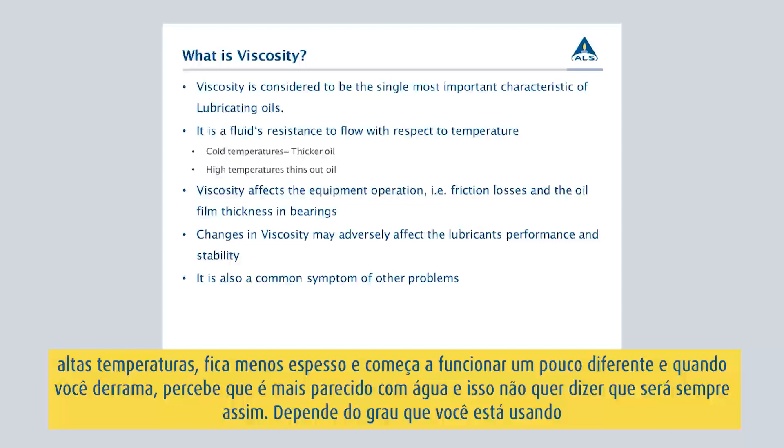Now, this isn't always going to be exactly how it is - it depends on what kind of grade you're looking at. But viscosity, that oil is used to help with friction loss and oil film thickness.

When we talk about oil film thickness, we typically have 3 to 4 general areas: boundary thickness, mixed thickness, and hydrodynamic. As we work our way down that list, film thickness increases.

When you're looking at boundary thickness, that's when you see 2 metal plates rubbing against each other, and you have a lot of friction going on there. It's oftentimes associated with metal to metal, so that's where you would see it mostly when equipment's starting, or when you're having stops, or even when you have a lot of shock with what you're using.

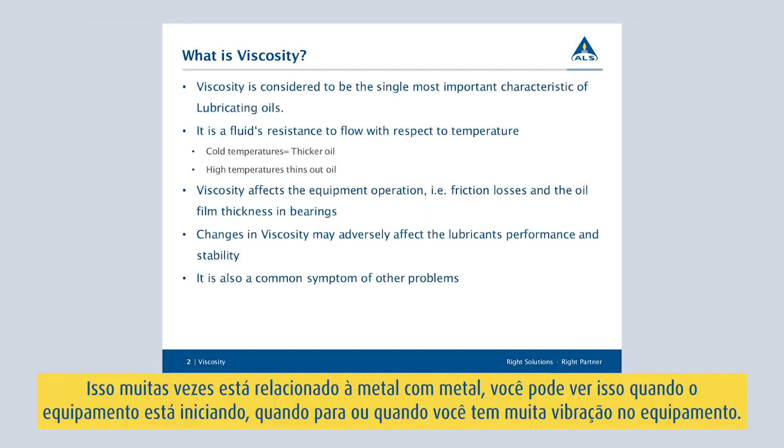When we get into mixed, that means your equipment's kind of been running, or you start to see that thickness increase. And when I say thickness increase, there's a separation being created between your 2 components, and you see more sliding going on and less friction.

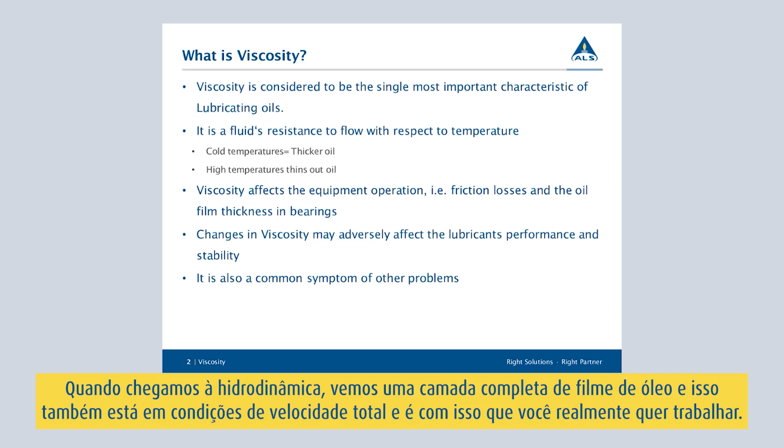When you get to hydrodynamic, you're seeing a full film layer of oil support, and that's also at full speed conditions - that's what you're really working towards.

But the reason I go into this oil thickness is that's how you decide if your oil's working correctly, as well as if you selected the correct oil. All that's important when we start to look at viscosity as a whole, and we start to look at analysis.

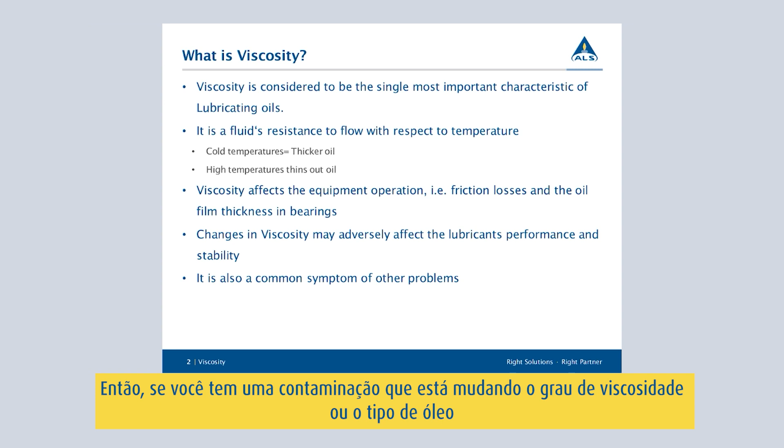As changes in viscosity occur, it starts to affect your lubricant performance and stability. So if you have a contamination that is changing your viscosity grade, or your oil type, making it either thinner or thicker, you start to see that in how it works with reducing friction and creating that film barrier.

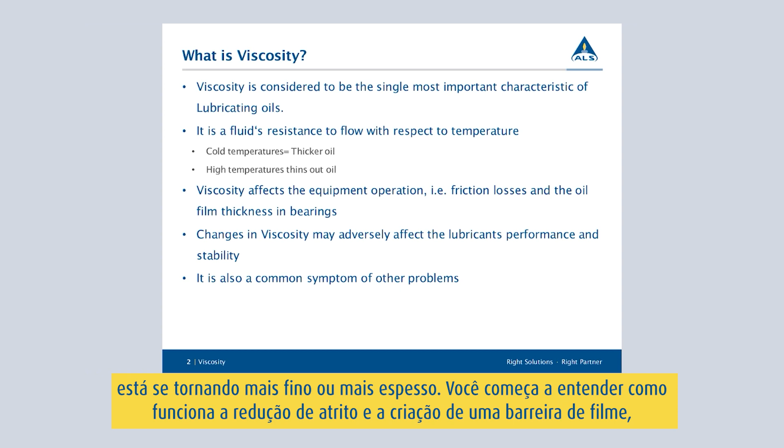So it is also a common symptom of other problems, and we'll get a little further into that later on, but that's just a basic overview of what we're getting at.

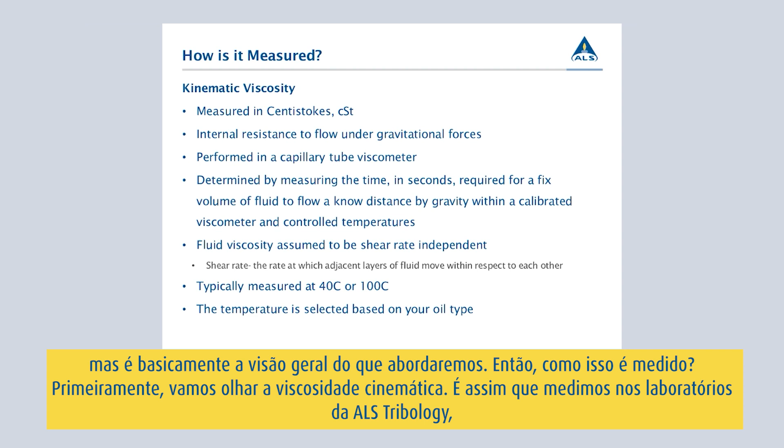So how is it measured? The first way we're going to look into is kinematic viscosity - that's how we measure it here at ALS in the tribology laboratories, and it's measured in centistokes. It's one of the more common ways to measure it. Kinematic viscosity is the internal resistance to flow under gravitational forces.

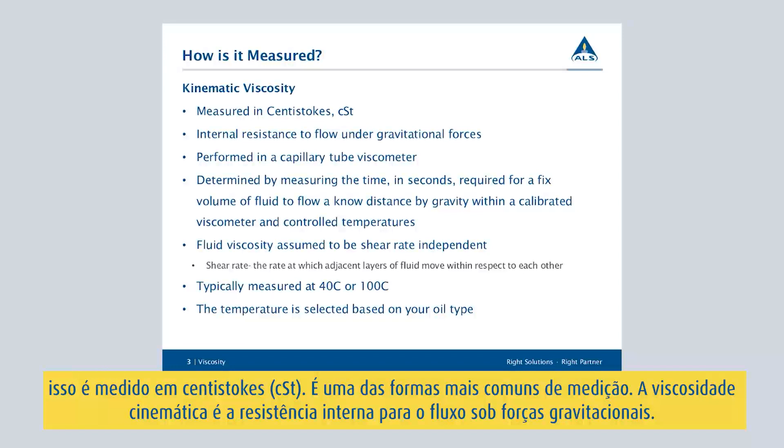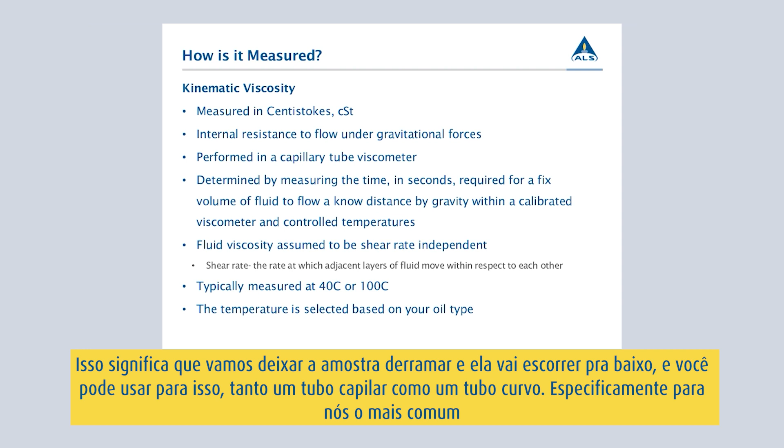Meaning that we'll drop a sample and it's going to flow down. You can either have a capillary tube or a curved tube, but for us specifically, and a more common one, is a capillary tube - meaning it's a very thin tube that the fluid is trying to get through. It's determined by measuring the time in seconds required for a fixed volume of fluid to flow a known distance. So we'll start at the top and work our way to the bottom, and that's a known distance that we're timing.

And so that's how we kind of look at measuring the flow. The temperature is controlled. If you control that temperature, then you can control your centistokes and your data and know that it's comparable. That's what we really get into - you want to be able to trend your history in oil, and having those controlled variables helps with that.

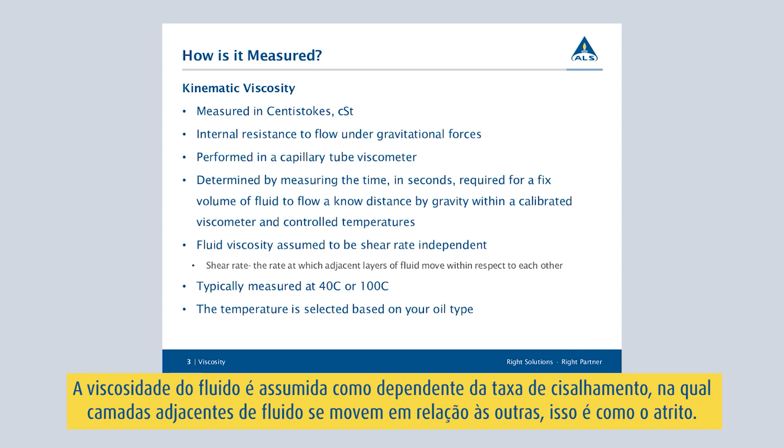Fluid viscosity is assumed to be shear rate independent, and shear rate is the rate at which adjacent layers of fluid move with respect to each other - so that's kind of like friction. With kinematic viscosity, the two common temperatures we see are 40 degrees C and 100 degrees C. When determining which one we're measuring at, it's based on the oil type and the equipment you're running.

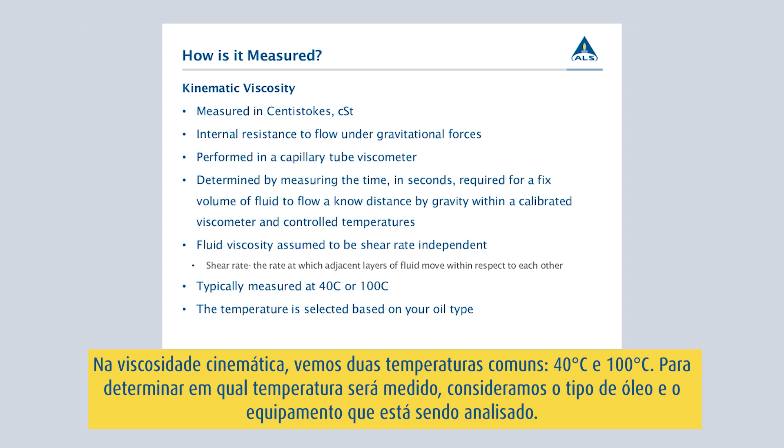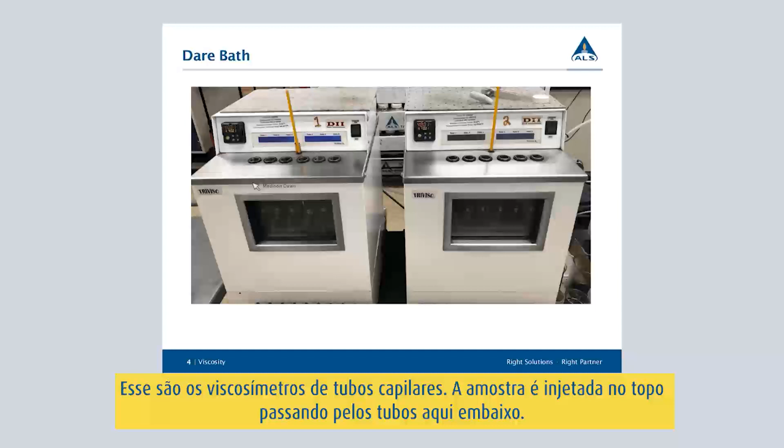These are Dare viscometers, and they use capillary tubes, so the sample is injected at the top into these tubes down here. We have a few different thermometers that we use to measure it, but this is an overview of what the bath is. It's a contained system so that your temperature is really controlled. And then we get into our capillary tubes of what you see.

So this is that top we saw where the oil kind of goes down. You can see in this picture that the top portion is a lot wider - it's what houses the oil. And then when you first inject it, you get into a much thinner capillary portion.

I've included this sensor over here that we use. This first sensor sits right here and basically holds pressure so that we can control the rate at which we drop it. We'll drop that oil sample into the tube, heat it to 40 degrees C or 100 degrees C depending on which temperature we're running at, and once that temperature has been reached, the pressure then releases so the fluid can start flowing.

As you start to flow, you have these three sensors down here, which are all equidistant. It times the distance between each sensor, and you can then get your viscosity in centistokes. This is that last portion, the very thin portion you kind of see, and then it injects out the bottom. So that's how we look at our capillary tube and measure that one.

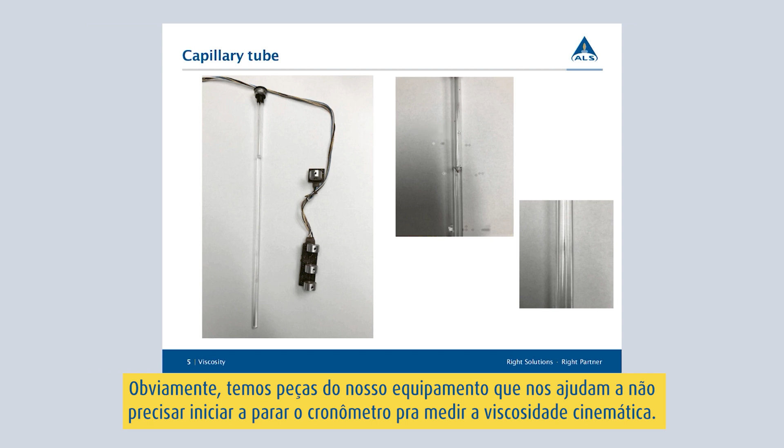And so that's why it's gravitational forces. We obviously have pieces of equipment that assist us in running it, so we don't just have to put it in and start a stopwatch and stop a stopwatch.

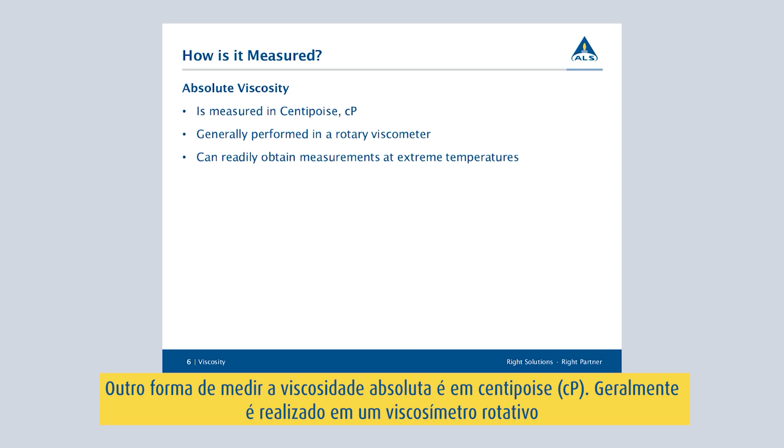The other way it can be measured is absolute viscosity, which is measured in centipoise. That's generally performed in a rotary viscometer and can be used for extreme temperatures - rotary meaning that it spins. What you typically see with a rotary viscometer is that a spinning portion is dropped into a beaker full of oil, and then it starts to spin and measure its resistance to flow in terms of how well it's allowed to spin.

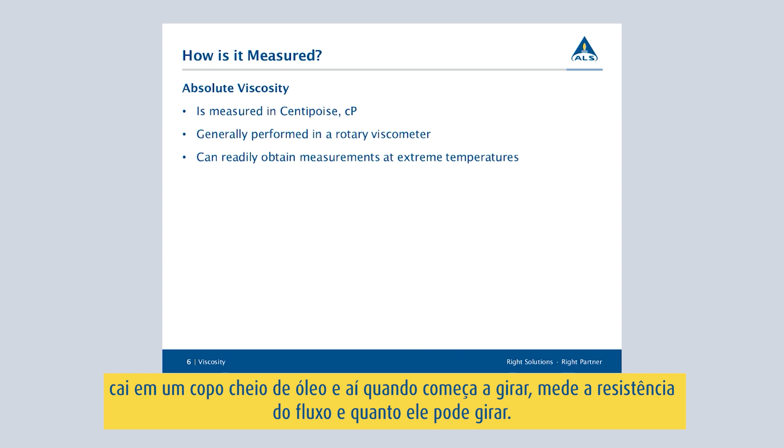It's an interesting setup, but our preferred method is definitely in centistokes - it's a more common one. As you look at your 40 degrees C and 100 degrees C, it starts to give a characteristic of our oil that can often be measured, but doesn't have to be, and is typically given on your product data sheets - that's your viscosity index. Viscosity index is the relationship between viscosity and temperature.

It has to be measured at two temperature points, typically 40 and 100, and you have a viscosity index range from 50 to 200 for common oils. You'll start to see that multigrade oils tend to have higher viscosity indexes, typically above 100. When we talk about terms like multigrade and straight grade, which we'll get into more, that's when you start to see SAEs, which is when you add that W.

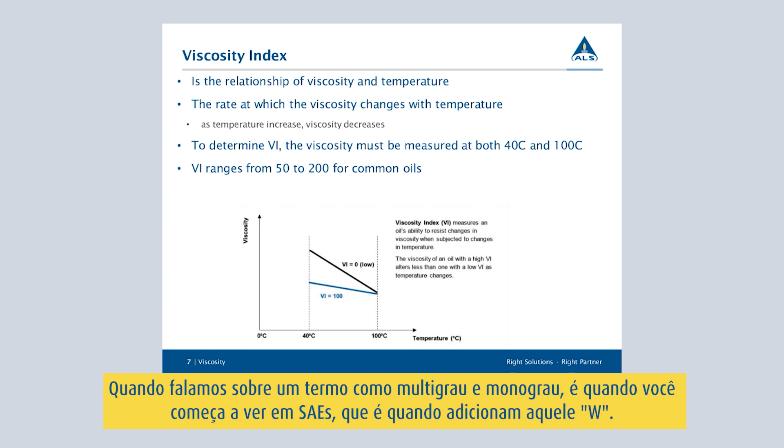Now that we've started talking about multigrade and straight grade, let's talk about the viscosity oil grade system. The first one we'll get into is ISO, which is typical for industrial oils. This one's really cool because the midpoint of each viscosity is a 50% increase above the previous grade. I have an example coming up, but below is ISO 15.

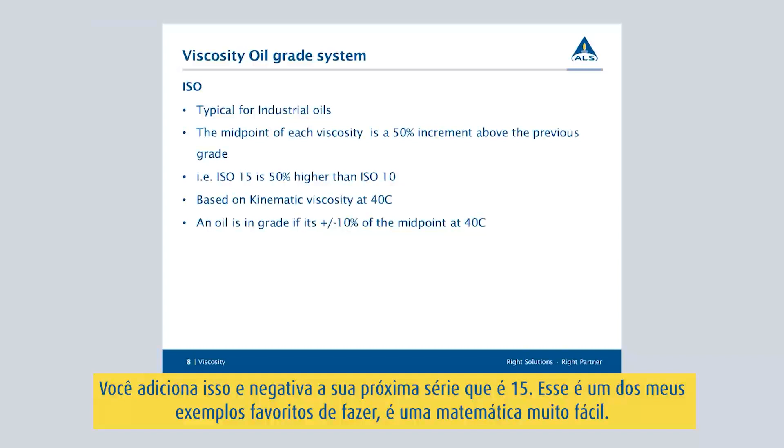ISO 15 is 50% higher than ISO 10. So if you take 50% of ISO 10, that's 5, add that in, and you have your next grade, which is ISO 15. That's one of my favorite examples to do.

It's very easy math. For your industrial oils and ISOs, it's based on kinematic viscosity at 40 degrees C, that's typically what we choose to measure it at. When you're looking at your oil grade range, it should fit into plus or minus 10% of the midpoint. So looking at 10, we say 1, meaning your range should be somewhere between 9 and 11.

Engineers should understand roughly what you're dealing with in terms of pump size, gears, and other components required for these different viscosities. For slow moving gears, you want a thicker oil, and oils that are too thin don't provide adequate protection. For gears that are very small and very fast, you want a thinner oil. This is like your hydraulic pumps or oil-filled bearings.

Typically your ISO 32s, 46s, and 68s are used in bearings and hydraulic applications. Your ISO 150s and 220s are often used in indoor gearboxes. We talk about indoor and outdoor because indoor temperatures can be controlled more, whereas outdoor temperatures you can't control.

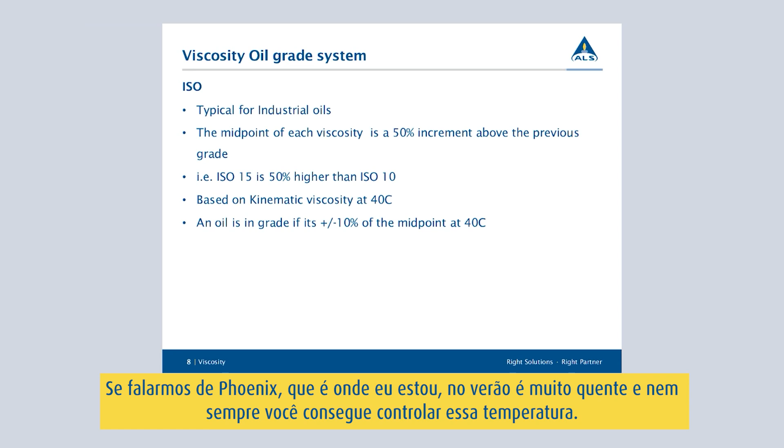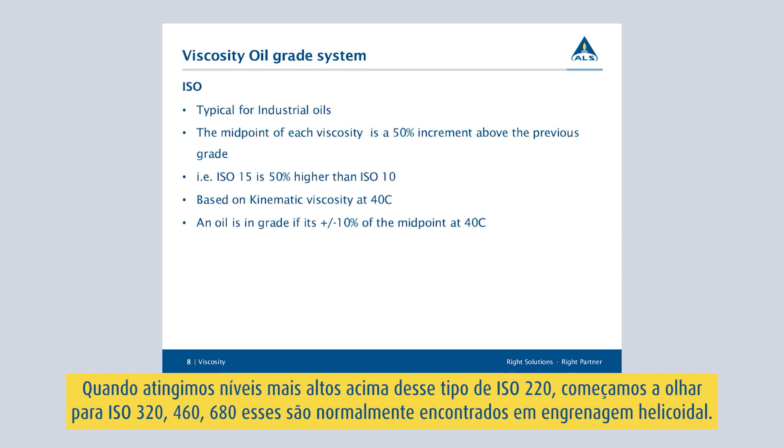If we talk about where I'm based, in Phoenix, summers get very, very hot, and you don't always get to control what that temperature is going to be. When we get into higher grades above that 220 range, we look at ISO 320, 460, and 680s, and those are typically found in worm gear applications.

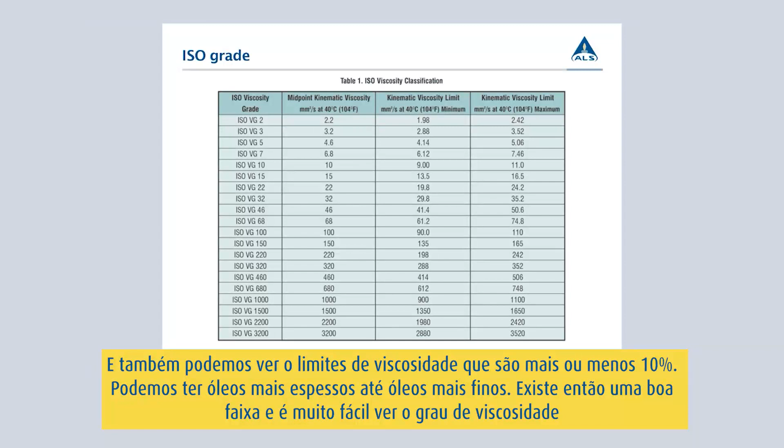So we look at our different ISO grades. We have our 32, 46, and 68, which we were talking about for bearing and hydraulic systems. You see the midpoints line up exactly with what we call the ISO grade. Then you start to see your viscosity limits, which once again are plus or minus 10%. We work our way up to some very thick oils, and down to some very thin oils, giving a nice range that's easy to see.

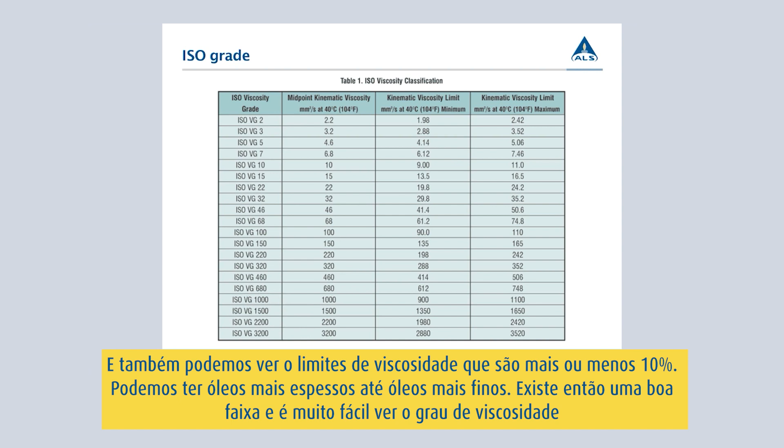So you see ISO, and then you have viscosity grade. Just things along those lines are what we're looking for to help.

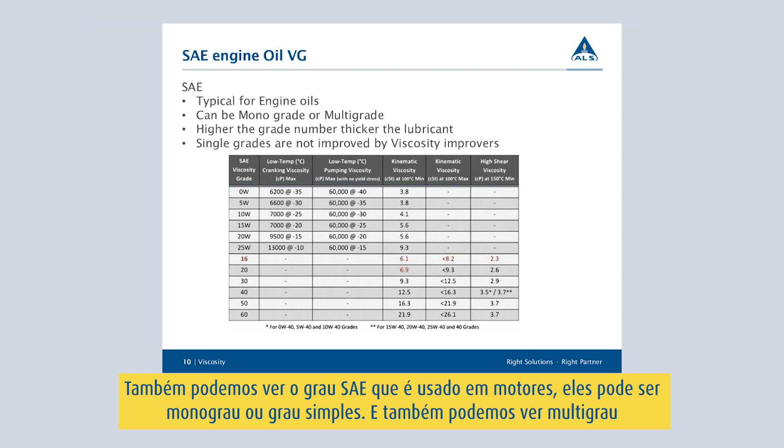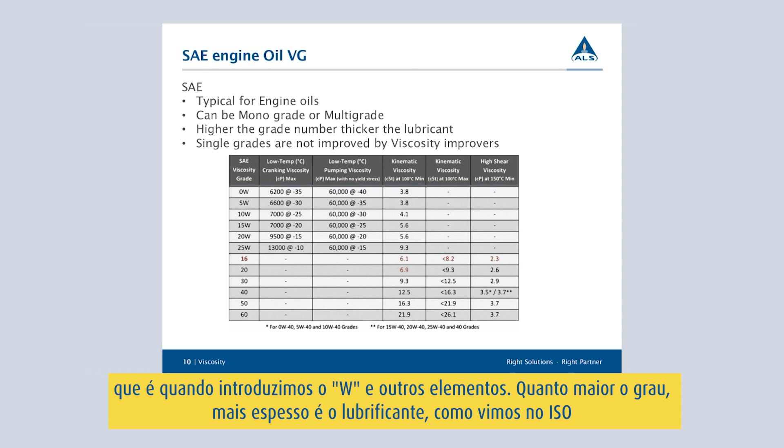Then you can look at your SAE grade, which is typical for engines. They can be a mono grade or a straight grade, mono and straight grade are the same thing. You can also see your multi-grades, which is when we start to introduce that W and a few other components. The higher the grade, the thicker the lubricant, same thing we were seeing on the previous slide.

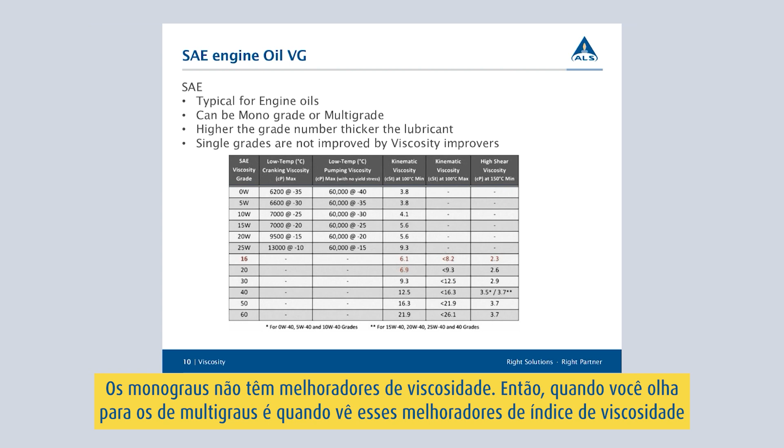Single grades are not improved by viscosity improvers. When you look at your multi-grades, they have been improved by viscosity improvers and things like that. So when we look at our multi-grade, still in the SAE grade, multi-grades are very functional. I want to spend some time on that one.

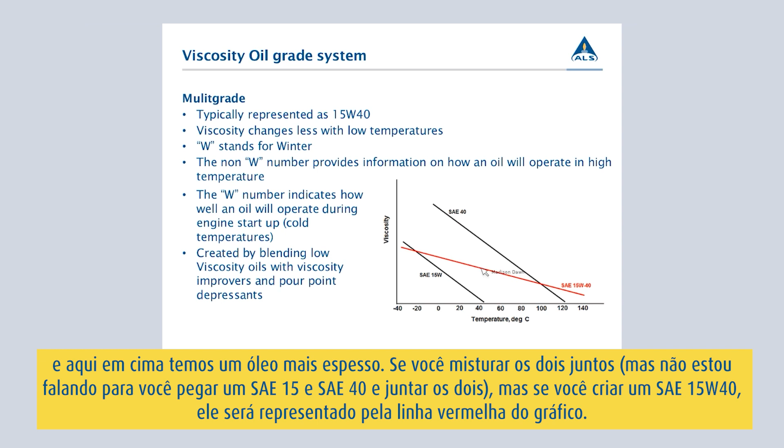So if you mix the two together - and I'm not actually telling you to take an SAE 15 and an SAE 40 and mix it together - but if you create an SAE 15W40, you start to see that graph change, and that's what we see with this red line. You see that we're able to look at a much broader range of temperatures, and your viscosity index, the slope, is kind of represented by the red line.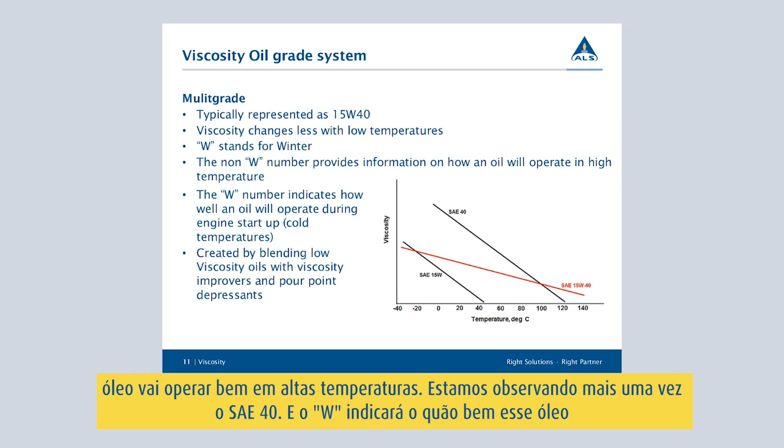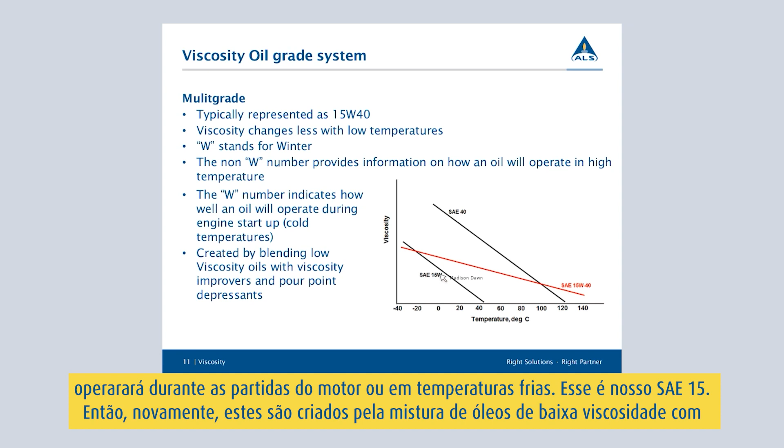The non-W will often indicate how well an oil will operate in high temperatures, so we're looking once again at this SAE 40. The W indicates how well that oil will operate during engine startups or cold temperatures, and that's that SAE 15. So those are created by blending low viscosity oils with viscosity improvers or pour point depressants to create that multi-grade.

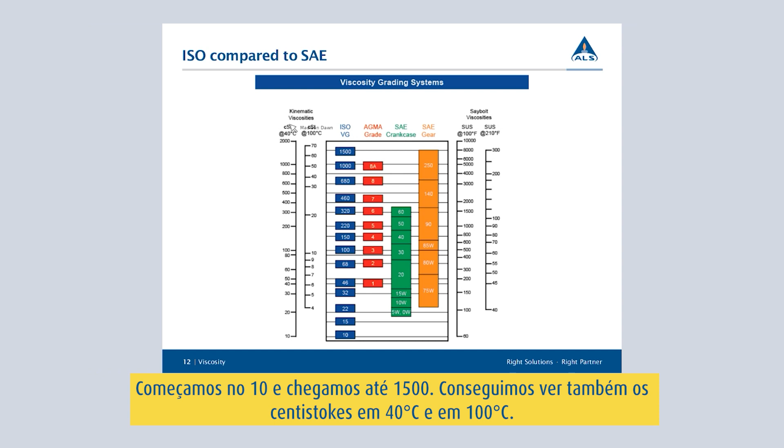So then we start to look at the systems together and how they can be related to each other. We can see that we have our ISOs over here - we start at 10 and work our way up to like 1,500. You also see that we're looking at our Centi-Stokes at 40 degrees C and our Centi-Stokes at 100 degrees C. You also have your ISO, your AGMA, SAE crankcases, and SAE gear cases.

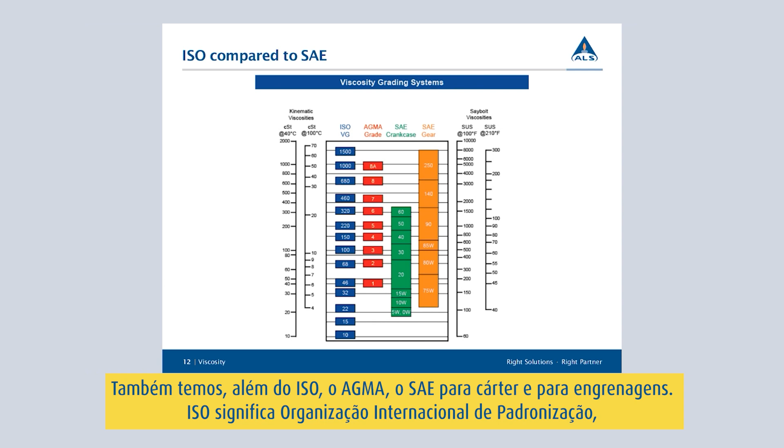I probably should have mentioned it earlier, but ISO stands for International Standards. SAE is Society of Automotive Engineers. AGMA is American Gear Manufacturers Association. You tend to see AGMA with older equipment - it's less common now.

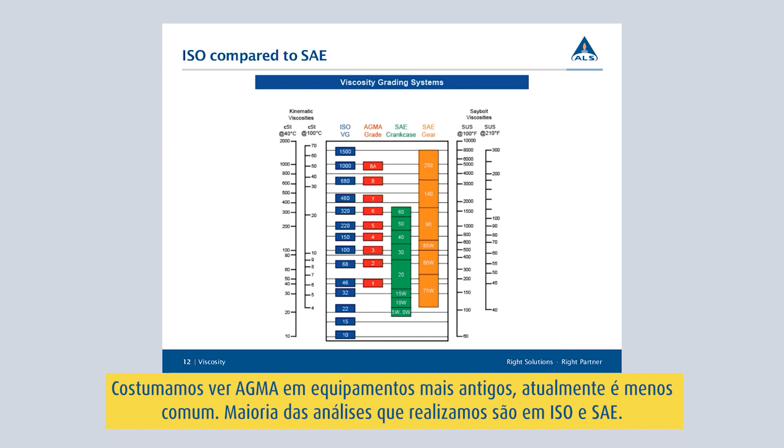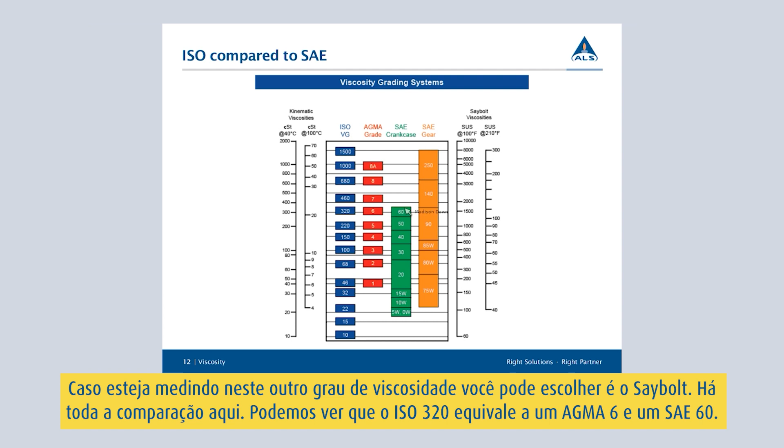At least in testing, most of the viscosities I see are either ISO or SAE grade. Should you be measuring, there's another grade you can choose, which is Saybolt. They have it compared here too. You can start to see with this ISO 320 that it's equivalent to an AGMA grade 6 or an SAE crankcase grade 60, and depending on where it falls, you're either at an SAE 140 or an SAE 90.

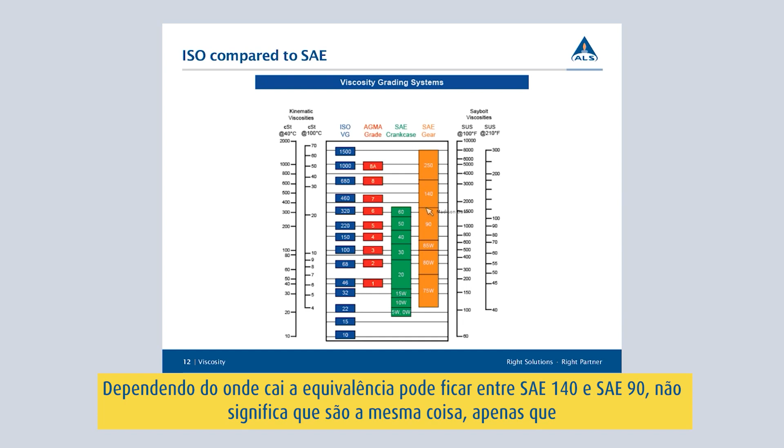That's just kind of relating them all together - it doesn't mean they're the same thing. It just means that when you're looking at the viscosity at either 100 degrees or 40 degrees C, they have a similar viscosity.

So as we've learned more about our oil, what it is and how it's related, all that information is very important to know how it's operating and what your viscosity should be operating at and what range it should fall within. As we test it, we start to either see that your viscosity can increase, decrease, or be where it's supposed to. When looking at decreased viscosity, we have a few common reasons, the first being fuel contamination.

Fuel contamination means that fuel is getting into your oil. As an example - this doesn't apply to every single one - if 10% diesel fuel is in motor oil, let's say SAE 30, it reduces your viscosity by more than 36%. So we look at what was 110 Centi-Stokes becoming 70 Centi-Stokes, and that film thickness that's created kind of decreases.

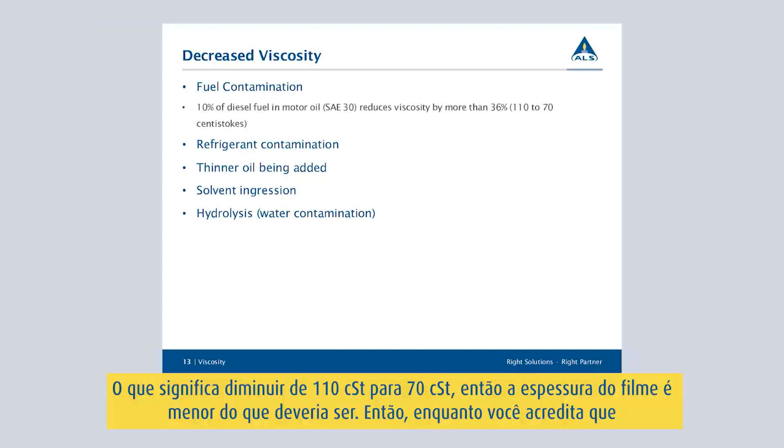So while you think and hope that yours is operating where it's creating a really good barrier at 110 Centi-Stokes, you could actually be operating at 70, which could lead to further issues.

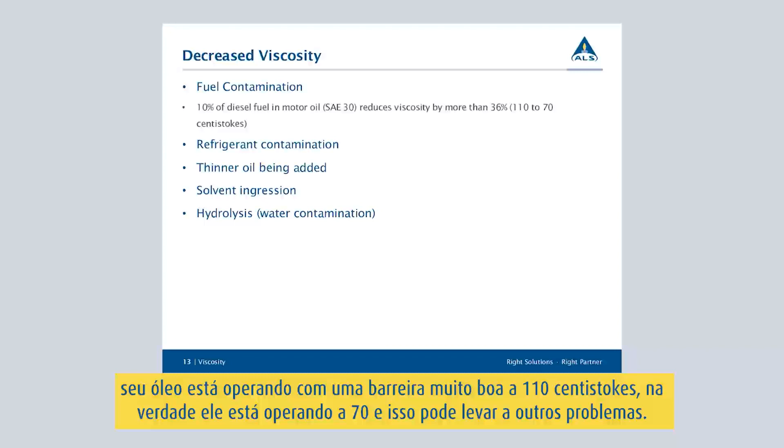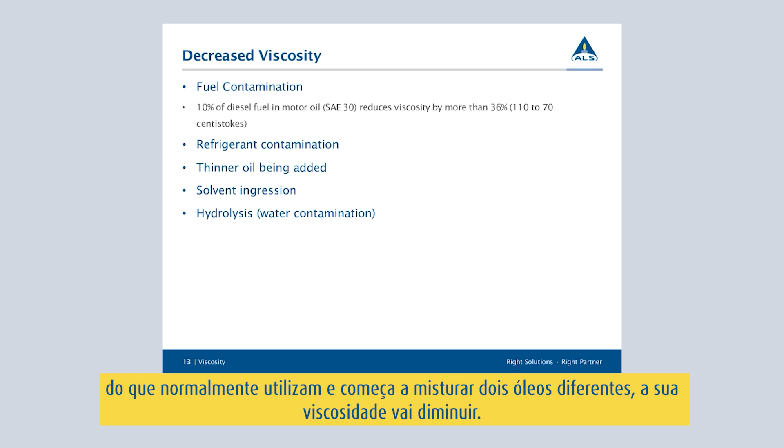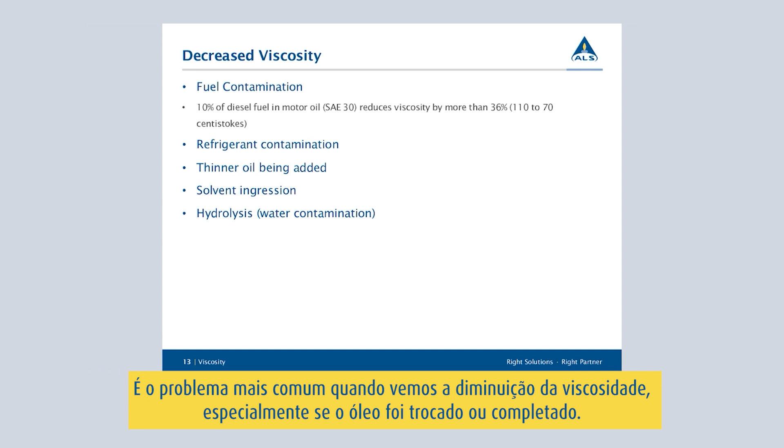Other issues that decrease viscosity are refrigerant contamination. Believe it or not, one of the more common ones is a thinner oil being added. If you're operating a larger company, or just by accident purchase a thinner oil instead of the one you regularly buy, when you mix those two together they'll decrease your viscosity, and you won't just have one grade of oil in there - you'll have almost a mix, and you never know how those are going to combine. It's one of the more common problems we see with decreased viscosity, especially if the oil's been changed, or as we call it, topped off.

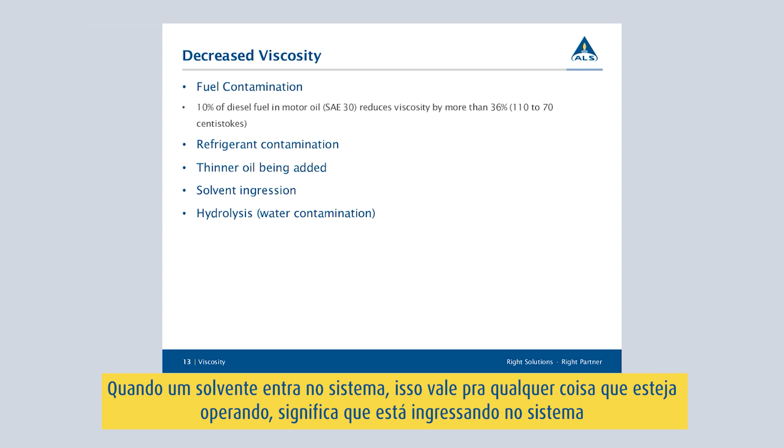Then you have solvent ingression. This is just for anything you're operating. Ingression just means it's being introduced into the system, whether all at once or steadily. You really just don't want that solvent in there. Solvent can range from any type of fluid that you're working with.

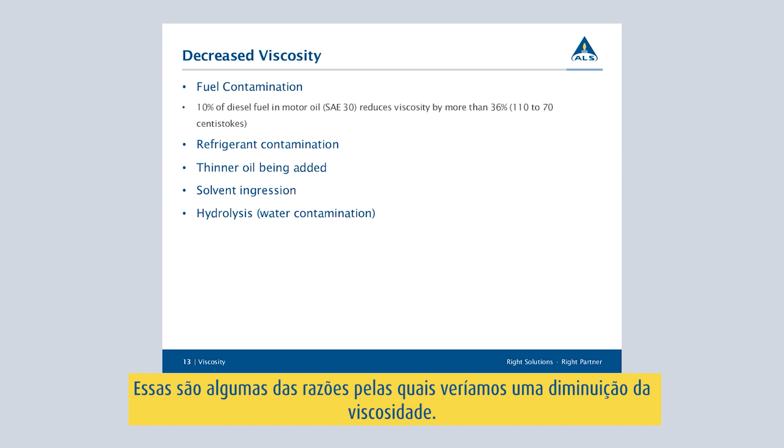And then you have hydrolysis, which is water contamination. You definitely do not want water being introduced into your system. So those are a few reasons that we would see a decreased viscosity.

So the opposite side of decreased is increased viscosity. When you have your increased viscosity, you start to look at soot contamination. Soot causes increased temperatures and slow flow of lubricants to the machine component, created by incomplete combustion of diesel fuel oils.

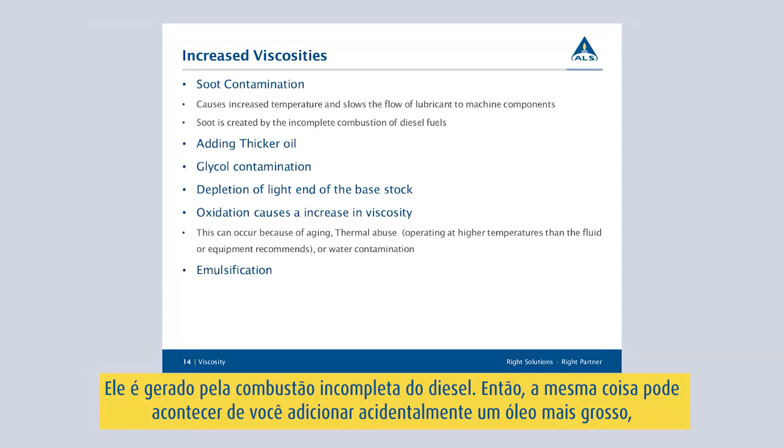So the same thing can happen - instead of accidentally adding a thinner oil, you can add a thicker oil in, which is not good either. When you add a thicker oil in, you should see increased viscosities. You don't ever want to mix things together because it starts to create scenarios where you're not sure if those oils are compatible. So you do want to make sure that you're topping off with either a compatible oil or an oil of the same grade or the same type.

We do have test series that allow should you have a desire to start to mix them. I can add more information on that to see if they're allowed to be mixed, but I definitely don't recommend just adding in an oil that you're not familiar with into your system.

So then you also see increased viscosities with glycol contamination, depletion of your light end base stocks, also oxidation can cause increased viscosity. Oxidation can occur because of aging, thermal abuse, meaning operating at higher temperatures than the fluid or the equipment recommends.

This could be that you start to see oxidation or thermal abuse, not because you personally are operating your equipment at a higher temperature than the fluid recommends, but maybe because you have an outside problem occurring. Maybe you have an increased viscosity, so then you start to have thermal abuse occur. It's kind of a which came first, the chicken or the egg scenario. You don't really know until you start to do that oil analysis on it.

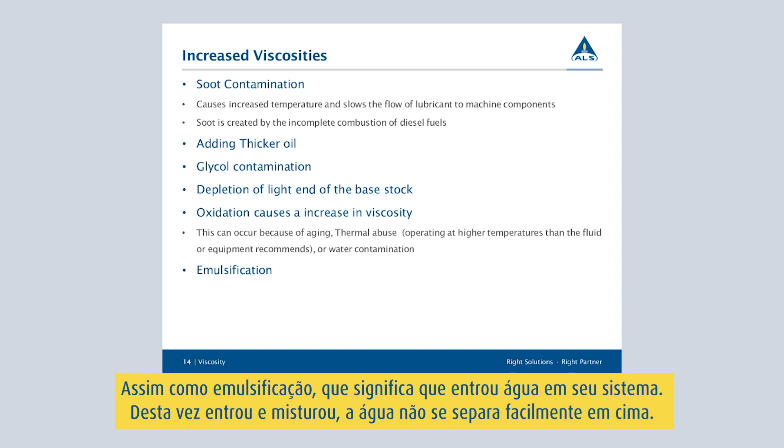As well as emulsification - that too just kind of means that water's been introduced, but this time the water's been introduced and mixed in. So that water's not easily separated sitting on top, because you know how you say water and oil don't mix? Well, sometimes you get a very cloudy and milky system that's going to occur, and then you know that your sample's really been emulsified. That cloudiness can be an indication of emulsification.

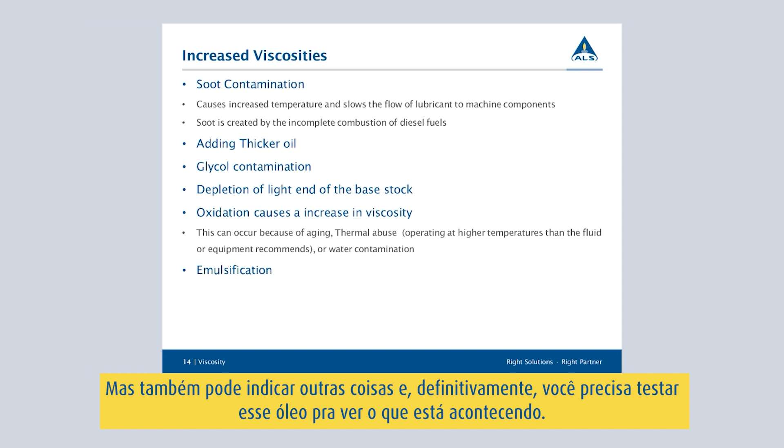It can also be an indication of a few other things. You definitely want to get that oil tested to kind of see what's going on there.

So I took all of that, and this is a chart some of you might have seen before, maybe not. We put it into just a common chart, our general guide for troubleshooting. So this is why your viscosity is increasing or decreasing. Please definitely refer back to this a few times.

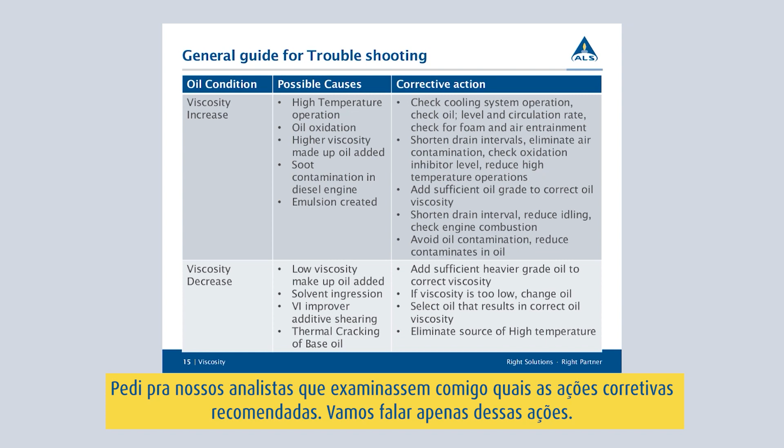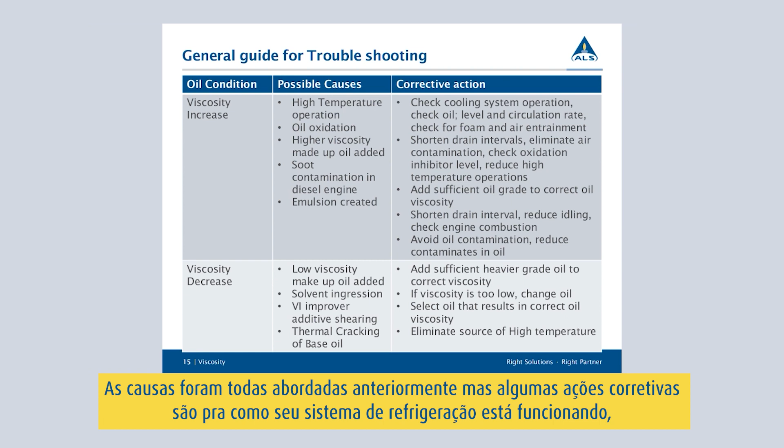I had a few of our diags look this over with me in terms of what the recommended corrective actions are. So we're just going to look over those recommended corrective actions. The possible causes were all addressed on the previous slide, but some of the corrective actions are checking how your cooling system is operating, checking your oil level.

Believe it or not, if your oil's low, you need to top it off, and having low oil can be just as bad as having dirty oil, because it means that your oil is not properly lubricating your system and you're creating more problems.

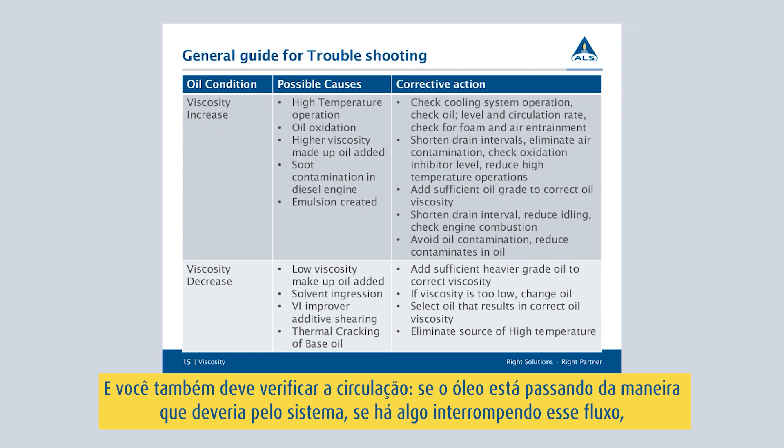So then you also want to check the circulation. Is that oil making it through the system the way it should? Is anything stopping that flow?

Then you also want to check for foam and air entrainment. When you start to work with equipment that moves very quickly or just relies on things, air entrainment can do just as much damage as a sediment that's in there. That foam created, you'll see, is where you can know that air is getting in, and air entrainment just means that air is kind of mixed within your oil. Sometimes you'll look at it and see it as bubbles.

So if that's the case, you can look at shortening your drain intervals, eliminating air contamination wherever it is occurring. So if you have a system that air is going to get in, you're probably going to have air entrainment.

But if you have an enclosed system where there really shouldn't be air getting in, that's definitely one way to do it. You always want to check your oxidation inhibitor levels. If your oil does have them, you can check by checking your oxidation level, or running an ICP to see if those inhibitors are still in place.

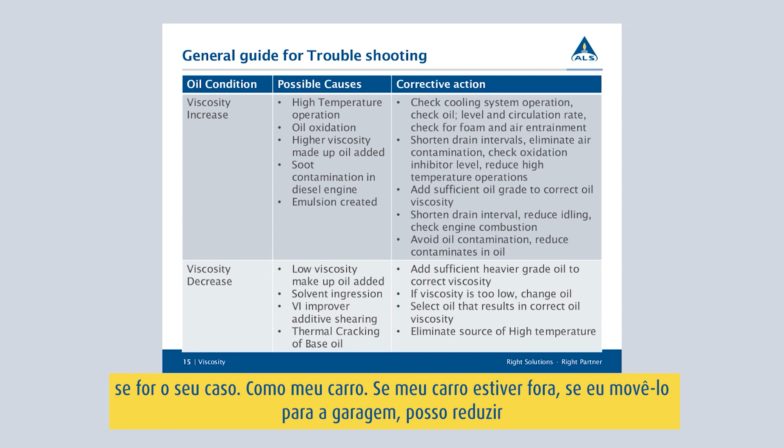And reducing high temperature operations. So if your equipment is like, let's refer back to my car, if my car is outside, if I move it into the garage, I can reduce my temperature. It's not always that easy, but sometimes it is.

You want to make sure that you've added sufficient oil grade to the correct oil viscosity. Once again, you'll see shortened drain intervals in there as well. Reduce idling, check engine combustion.

The reason shortened drain intervals is in there twice is sometimes you are trying to get the most useful life out of your oil. But if you're seeing that every time you're going to change your oil, it's not in a good condition, it might be something you consider based on your own maintenance program, or even based on your oil analysis, that your drain interval does need to be changed.

And sometimes it could mean if your oil is operating really well, you can extend that drain interval. But you do have to check with the OEM, with your product data sheets, as well as maybe shooting a quick message over to ourselves to ensure that it's right. You also just want to avoid any type of contamination and try to reduce oil contaminants in your oil.

So this is for increased viscosity. So then we look at decreased viscosity. Add sufficient heavier grade oil to correct viscosities. Once again, just making sure that your oil levels are correct.

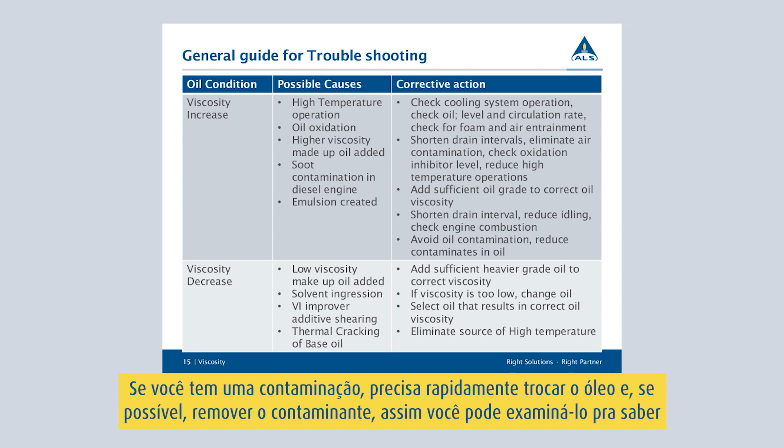If it's too low, you want to change your oil. If you've got a contamination, you want to potentially look at changing it if you can. If there's a way to remove the contaminant, you can definitely look into it. And that's kind of what your system's operating and what your maintenance will allow you to do.

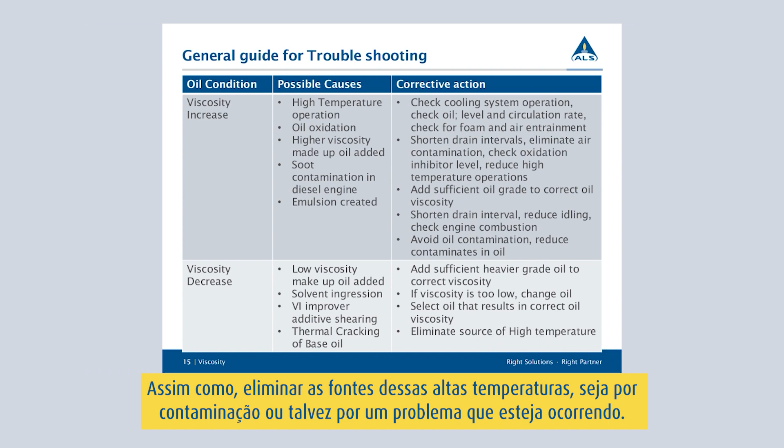So you want to select the correct oil. So if you're running it and you're seeing this decrease, it may be because of shearing, meaning that at your higher temperatures, they start to shear off, meaning that you might need to look at a different oil for your system so that it can withstand the temperatures that it's operating at, as well as looking at eliminating the sources of those high temperatures, whether that's contamination or maybe an issue that's occurring.

So lastly, we have testing your oil sample, which is kind of just tying this all in a pretty bow. Why did we explain what oil that you use and all this information as well? It's because it's just as important to test your system as it is to select the right oil, and vice versa. So if you have the right oil selected for your system, you're testing it to maintain its level.

Well, maybe you don't have the right oil for your system and you're testing to kind of figure out what is the right oil, or talking to your OEM, things like that. So it's very important, and testing your oil can tell you so much about your system, and it's so important because viscosity is one of the most important properties of oil.

So a viscosity change can indicate larger issues with your systems, as well as it tells you that everything's operating well. Typically, if something's not operating well, you will see a change in your viscosity.

One thing you do want to keep in mind, though, is when you are testing your oil samples, sometimes multiple issues can cover each other up. So if you have soot contamination as well as fuel in your system, you will see both a decrease and increase in your viscosity that could even themselves out.

But if you're testing your oil and you're including other testing in it, like soot percentage, oxidation, nitration, you'll start to see those things that indicate that they're high. And you'll also be able to kind of look it over and say, oh, it seems that our soot is high, but our viscosity is normal. Why is that? What else is occurring with my system?

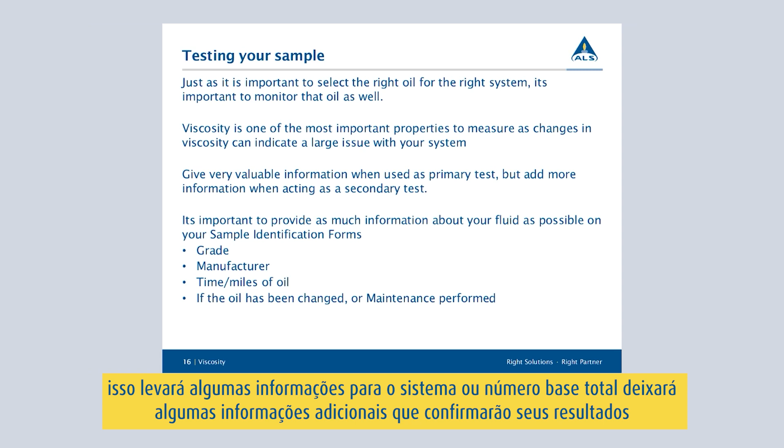So to get a little more into that, it's basically saying that it's a very valuable tool as a primary test, but it also adds a lot of information as a secondary test. So if you are having your total acid number checked, it's going to lend some information to that system, or total base number. It's going to lend some additional information that's either confirming your results or basically saying, okay, these ones are fine, but it seems that there's something else wrong with your system.

So it's very important to test your oil sample, and viscosity is one of the things that you want to get checked every single time.

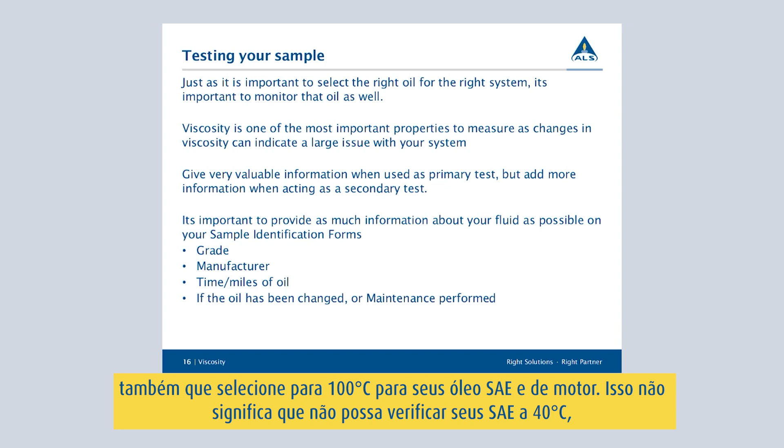It's also important that you're checking your oil at the right temperature. You're picking 40 degrees C for your ISO industrial oils, and then 100 degrees C for your SAE and engine oils. That doesn't mean you can't check your SAEs at 40 degrees C, especially if your OEM recommends it or your product data sheet does. Those are acceptable things.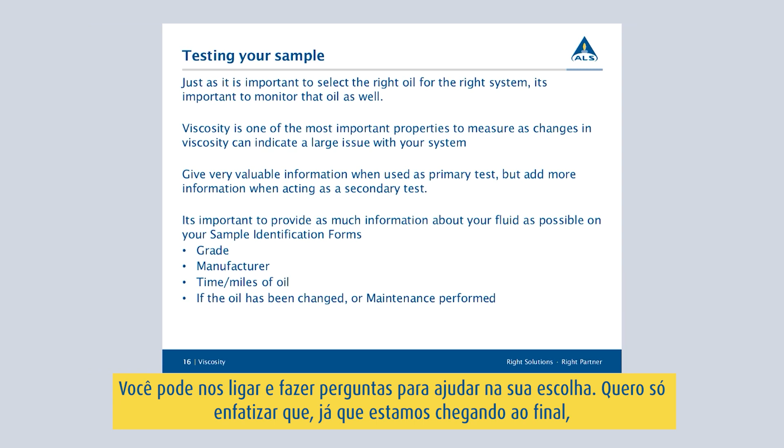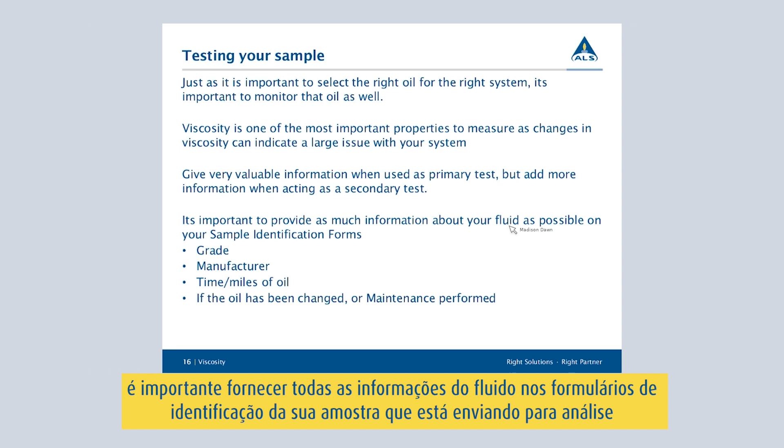And you can always call in and ask us these questions as well to help you out. But one of the things I want to touch on and really emphasize as we draw to a close is providing your fluid information on your sample identification forms, or providing that information when you're testing.

So when we start to test your viscosity, I've talked about how important a grade is and what it's going to tell you about your information. But if you don't provide that with us, all we can provide you with are your results. You'll get a much better diagnosis if you are providing that grade information. It allows our diagnosticians as well as our team to know a lot more about your system and what you're operating. So then you'll also look at your manufacturer, and that's who's making your oil.

The reason you want to do that is we can look at product data sheets and compare it to your results, as well as look at what your baseline should be and what it's recommended. Then you want to look at what I refer to as the age of the oil, but you want to know the time and the miles of the oil. We want to know how long you've been operating it.

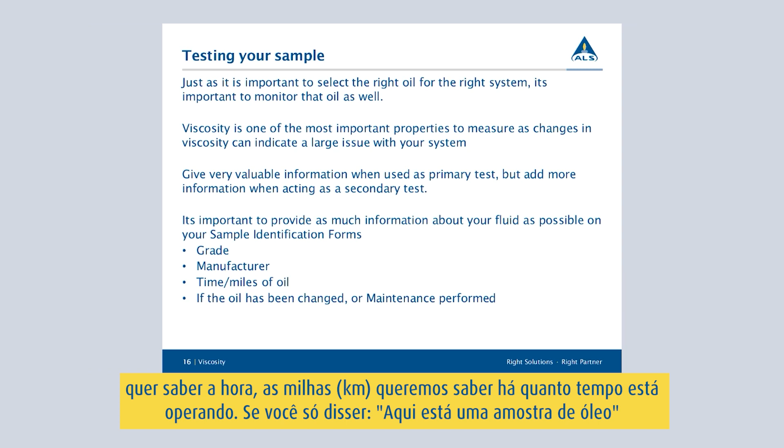If you just tell us, here's an oil sample, and we don't know the grade, the manufacturer, or the time on the oil, all I can tell you is what your results are, what your viscosity is that we've measured it at, and things like that.

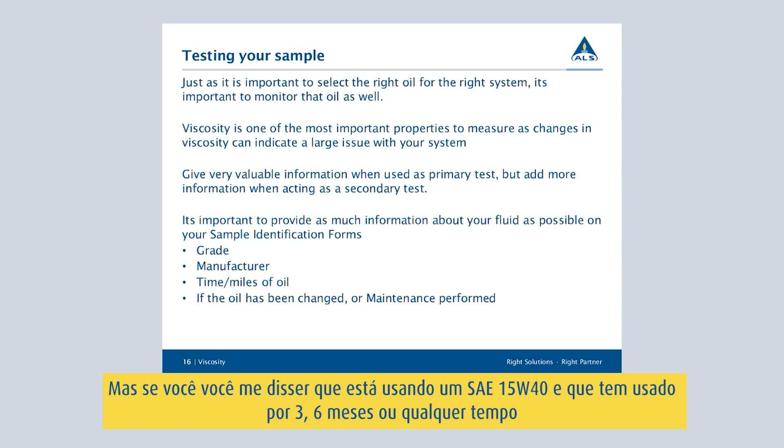But if you tell me that you're running an SAE 15W40 and that you've been running it for 3 months, 6 months, however long, or even how many miles you've had on it, I can start to say it's recommended that you change your oil now, or yes, I am seeing fuel contamination in the system. This is my recommendation for changing it.

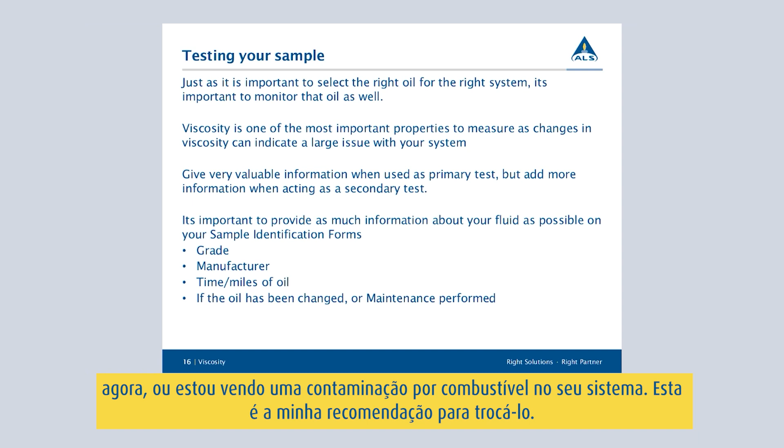We also want to see what's been done to your oil. Have you recently changed your oil? That all goes back to the time and the miles of the oil, because if you have recently changed your oil, your history on your sample is going to change.

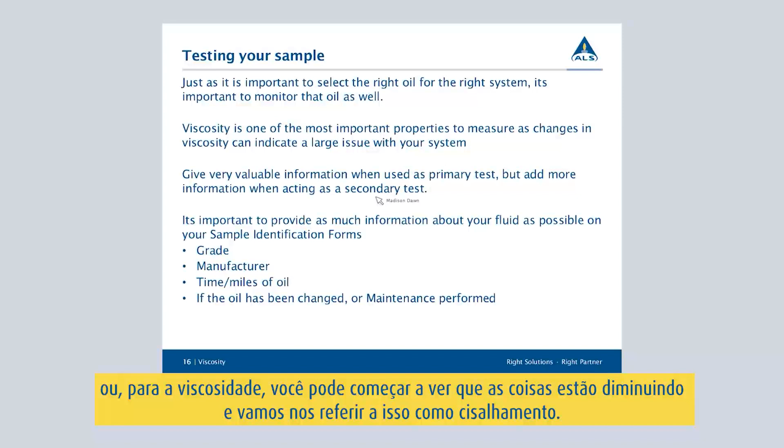And that history is key, because we start to create a trend for you. You're going to see either things staying steady, kind of straight lines, or you can start to see things increasing. As certain tests or things increase, especially viscosity, sometimes the recommendation is to change it, or for viscosity you can start to see things decreasing, which we'll refer to as shearing.

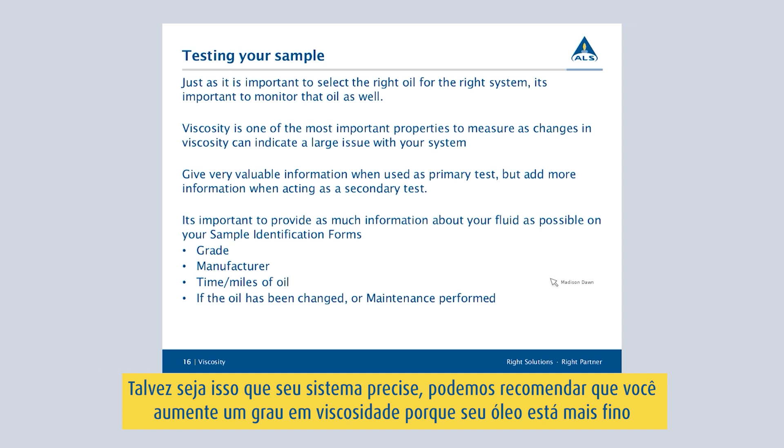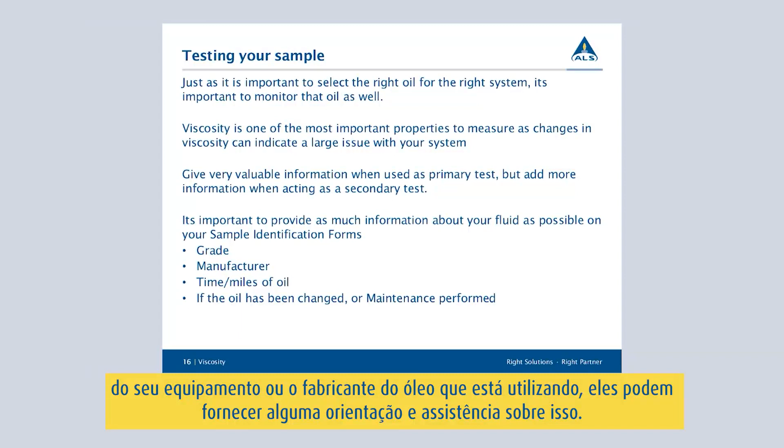So maybe your system needs us to recommend that you go up a grade in viscosity, because your thinner oil is just shearing out too quickly. A lot of these things are things that we can help you with, as well as if you provide your oil analysis to the OEMs of either your equipment or the oil you're working with, they can provide you some guidance and assistance with that.

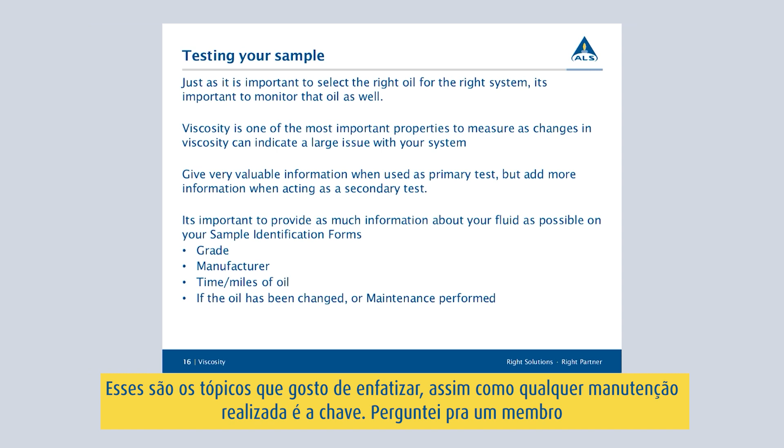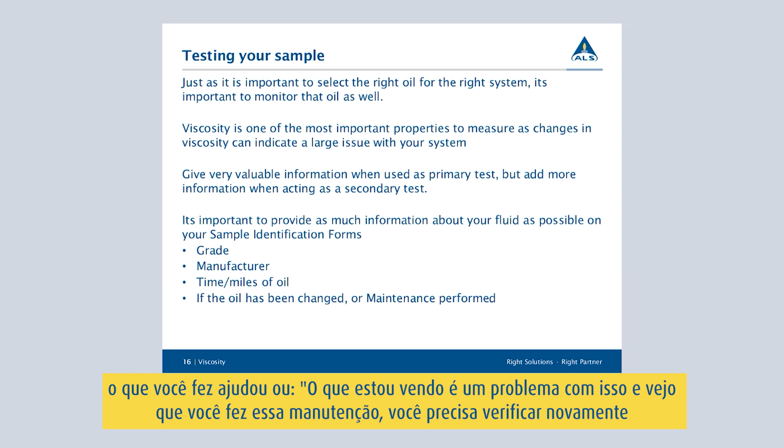So those are huge things that I always like to push and let you know, as well as any maintenance performed. This one's key. I actually asked one of our diagnosticians if they thought anything else should be included, and that's what maintenance you're performing. Because if you've performed maintenance on your equipment and done something, if they know what you've done, they can help either say what you did was good, what you did helped, or, you know what, I am seeing an issue with this, and I see that you did this maintenance.

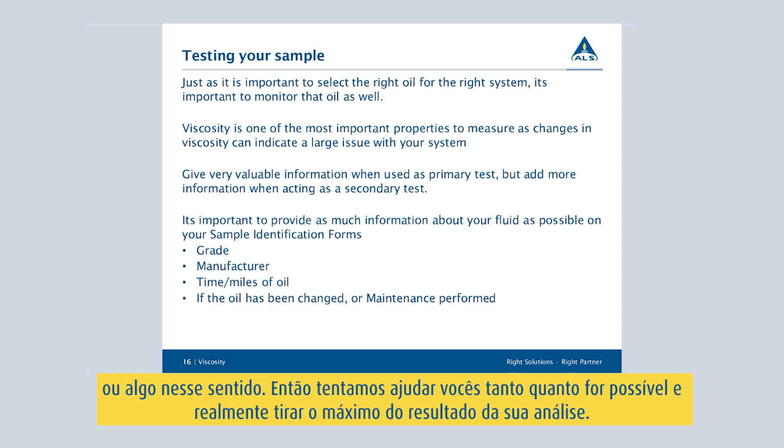Do you want to double check and make sure that air's not getting in because there might not be a proper seal or something along those lines? So we try to help you guys out as much as possible and really get as much out of that testing as possible, because you're submitting your sample in.

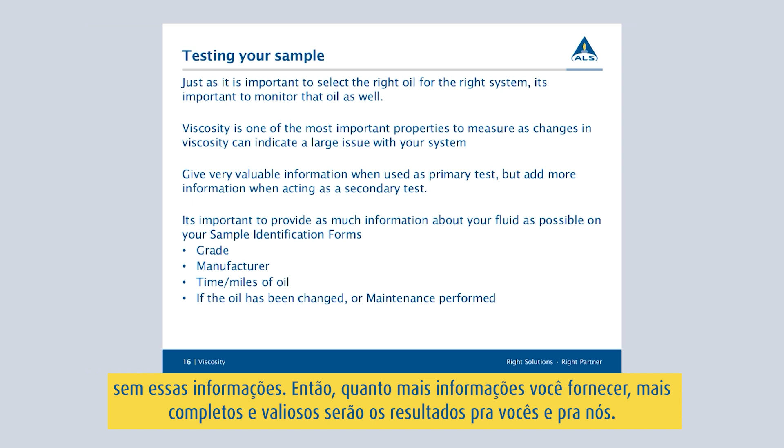And the more information you provide and the more correct the information is, the better. I can tell you that I've had customers that have nothing on their SIFs and they fill it out, and we work the best that we can with that. But the more information you provide on the system, the more valuable your results will be to you and to us. Thank you.